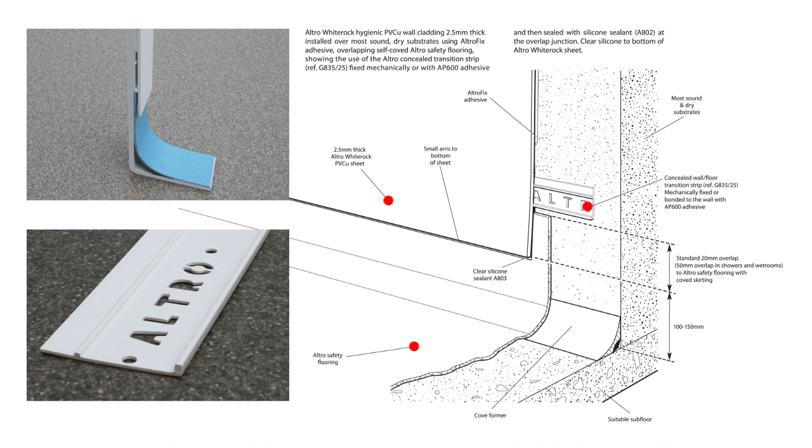This short video clip offers an introduction to the Altro hidden transition strip. This trim makes the transition between coved Altro vinyl flooring and the Altro Whiterock wall sheet very easy to create. It also means the transition generated will allow the flooring to be uplifted and replaced at the end of its life, or if the flooring gets damaged, all without the need to remove the Altro Whiterock sheet from the wall.

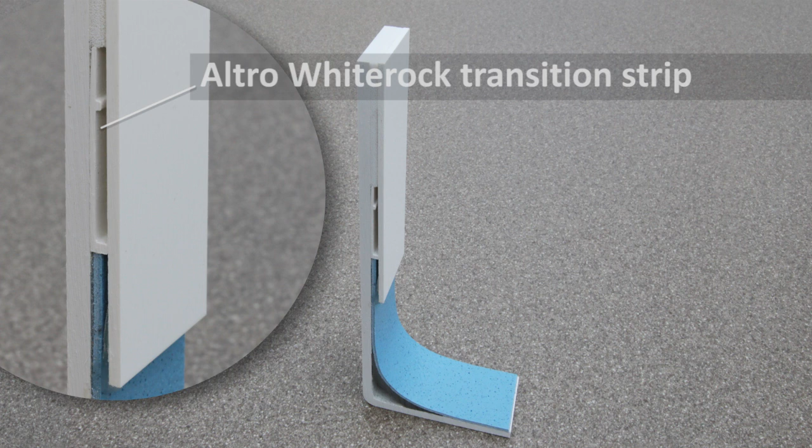This is the trim. It's designed to fit behind the base of the Altro Whiterock wall sheet to give a consistent void from the wall substrate. This creates a gap at the bottom of the sheet which is large enough to allow any Altro vinyl flooring product to be easily inserted or removed if the floor needs to be replaced for any reason.

There are two methods of installation, one that allows the floor to be installed first, the other that allows the wall to be installed first. This video covers the process of installing the Altro walling system before the coved vinyl flooring.

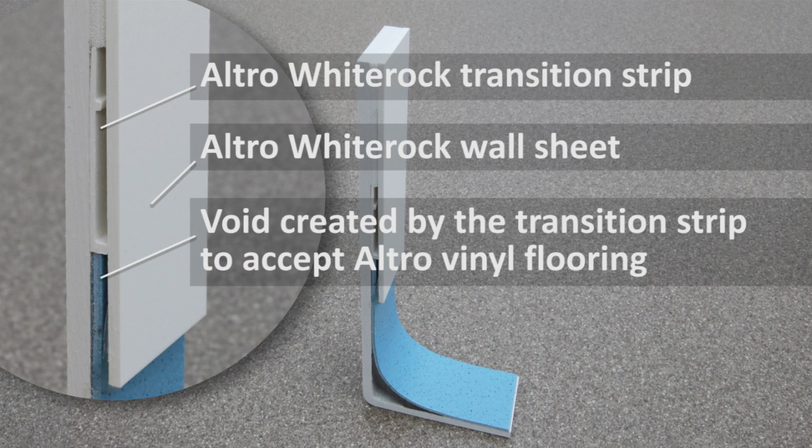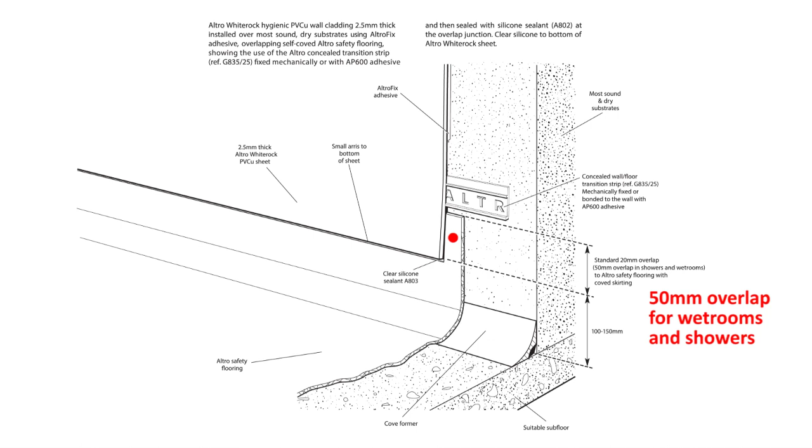Mark a datum line on the wall for installing the Altro Whiterock wall sheets, and then, from this datum line, measure and mark on the wall where the top of the coved vinyl flooring needs to finish. This needs to be at the right height to allow the Altro Whiterock wall sheet to overlap the flooring to the specified finishing point. That's 50 mm for wet rooms and showers when using products such as Altro Aquarius, and 20 mm for all other areas.

Using a string line or laser level, mark a line around the base of the room where the top of the hidden transition strip needs to be positioned and fix it in place using either mechanical fixings or Altro AP600 adhesive. Once the trim is secure, install the Altro Whiterock sheets in the usual way, following Altro specifications for the Altro walling material to be used.

Make sure that the adhesive on the back of the sheet does not go below the transition strip, as this area needs to be left clear so the flooring can be pushed up behind the Altro wall sheet. The installation is now ready for the flooring to be fitted. This is done in the usual way, following Altro specifications for the type of vinyl flooring to be used.

The coved section of the flooring is pushed up into the void created by the transition strip behind the bottom of the Altro wall sheet. Once the flooring is in place, the join between the bottom of the sheets where they overlap the flooring should be sealed with translucent Altro silicone sealant.

This installation solution now means that, if at some point in the future the flooring needs to be replaced, it's a simple procedure to run a flat blade under the base edge of the Altro Whiterock wall sheet so the silicone seal between the floor and the wall is broken. The flooring can then be removed. The new floor can then be installed and the coved edge pushed up into the gap created by the hidden transition strip.